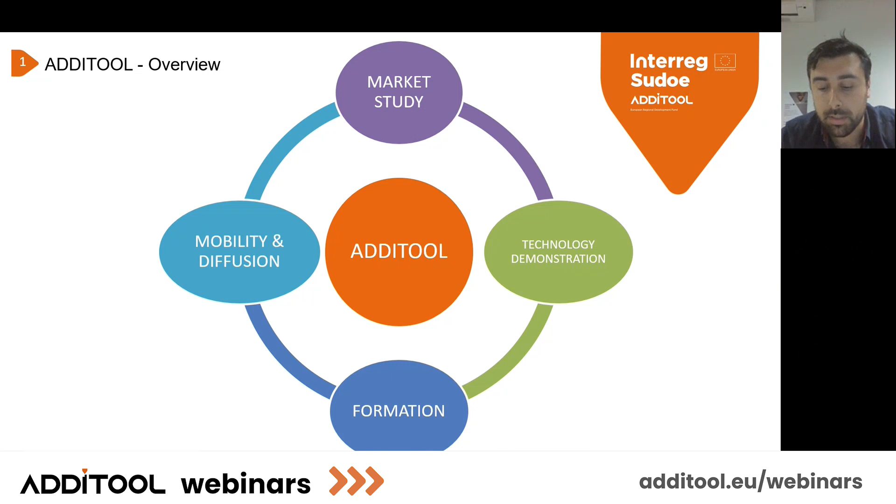The first work package of this project is the market study, which conditions the whole rest of the project. This market study made it possible to have a deep analysis of the tooling market, which we carried out in the first year of the project. We also carried out an opportunity study for the development of MAM technology, and defined real industrial use cases developed within the project.

On the Additool website, www.additool.eu, you can find the complete deliverable, downloadable for free in PDF format and available in 3 languages: French, Spanish, and Portuguese. And it's totally free, you can check it out.

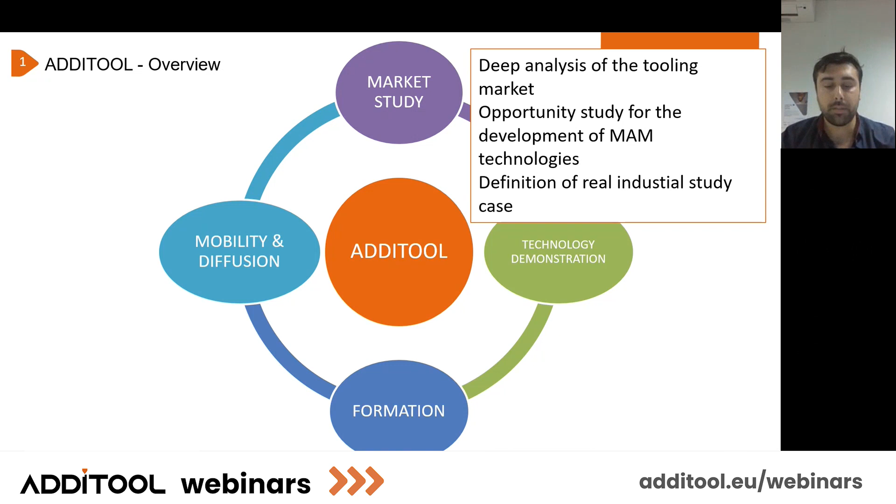The second main axis of the project was the technological demonstration part. Thanks to the market study we carried out before, it was possible to develop new materials, a new powder for metal additive manufacturing. We characterized the wire and the powder for each technology, so we had a lot of material testing, with raw material and also all the specimens after manufacturing. We performed various tests on this material.

And then we were able to manufacture five pilots and test them in real conditions. The tests in real conditions will take place from the end of January until February.

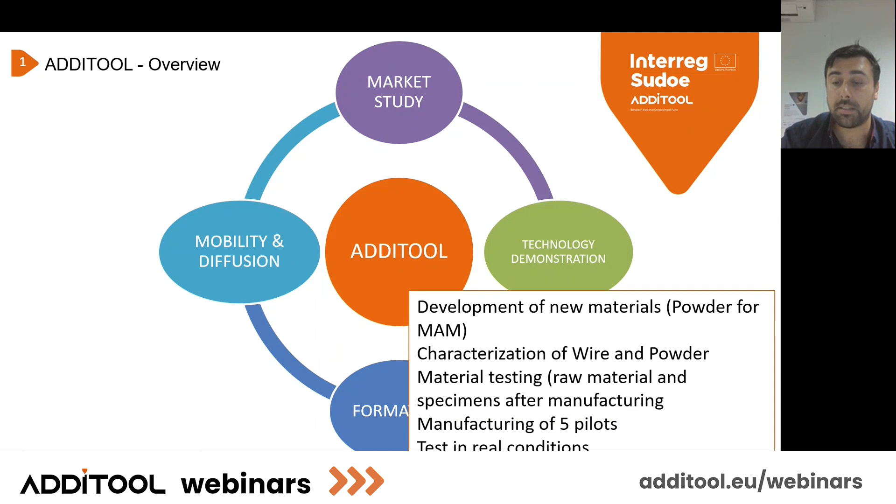Finally, the third and fourth major axes, the last work packages, are training, formation, and also mobility and dissemination. So we organized 5 training modules for students, about 2 weeks of training. We also had mobility of researchers and PhDs throughout the project, exchanging a lot of people from each entity and working with other partners, creating great collaboration.

And the last part is training through 7 webinars. This one is the 5th webinar we organized. You can find all the previous webinars we recorded directly on the project on the website, additool.eu.

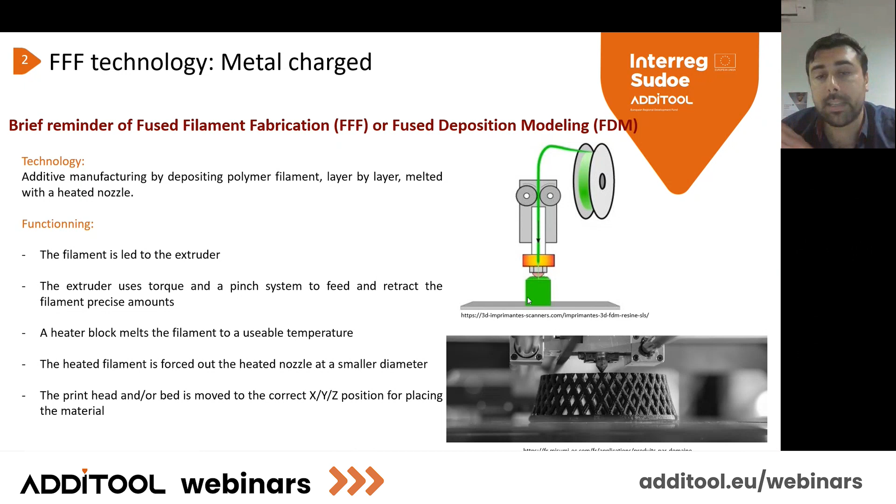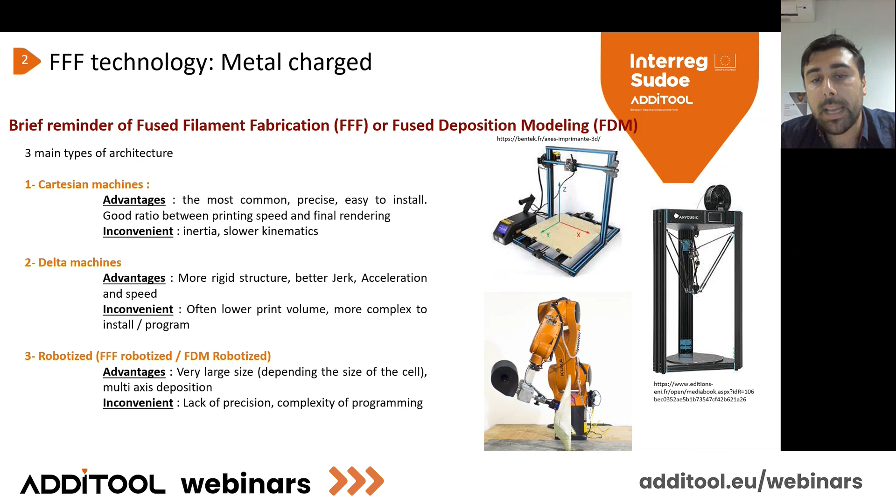It is more complex to install and program because we have a delta machine and not a linear axis. And finally, the last one is the robotized FDM-R, fused deposition modeling robotized, which allows a very large size depending on the size of the cell. It's multi-axis deposition; we can have a robot with 6 axes, and add a positioner to have 8 axes, moving in 3 dimensions. This is very interesting. However, with this kind of technology we can find a lack of precision due to the robotic arm, and it's much more complex to program.

Also, before I introduce the metal charge aspect, we have to take into account 2 main types of material distribution, and we will see that it is important for the following discussion.

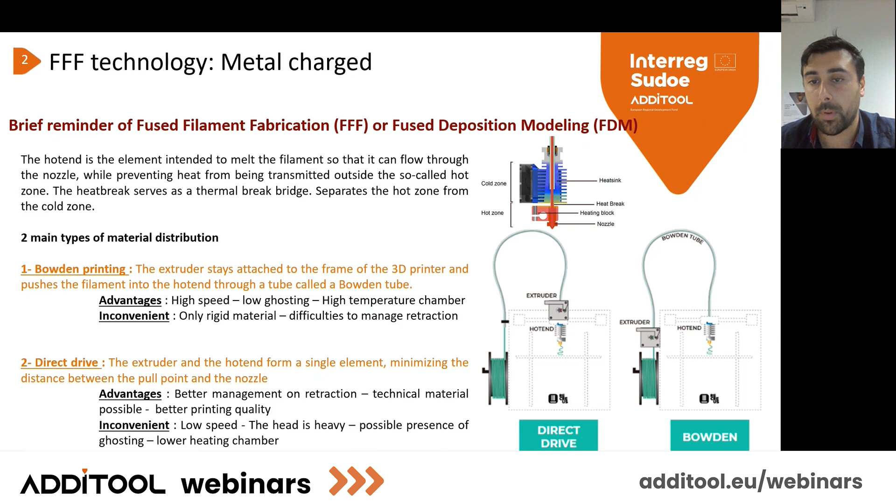So with metal charge, the objective, and it was also the objective of Additool, is to obtain an all-metal part using conventional 3D printing technologies.

So technology we can find directly on the market with Creality, Raise3D, Zortrax, etc. Every machine we can find on the market. And the objective is to make metal additive manufacturing technologies accessible to everyone.

As you may know, the other processes like DED wire, DED powder, or PBF laser, the cost of the machine is very, very important. It's more like 500,000 euros, 1 million euros for the machine.

And we have the idea at Additool to use technology which is based on the MIM process. It's MIM-like, it's metal injection molding.

The MIM process we can also compare to binder jetting technology. It's a powder bed with a binder. And we want to compare this technology, this material aspect, etc., to another technology.

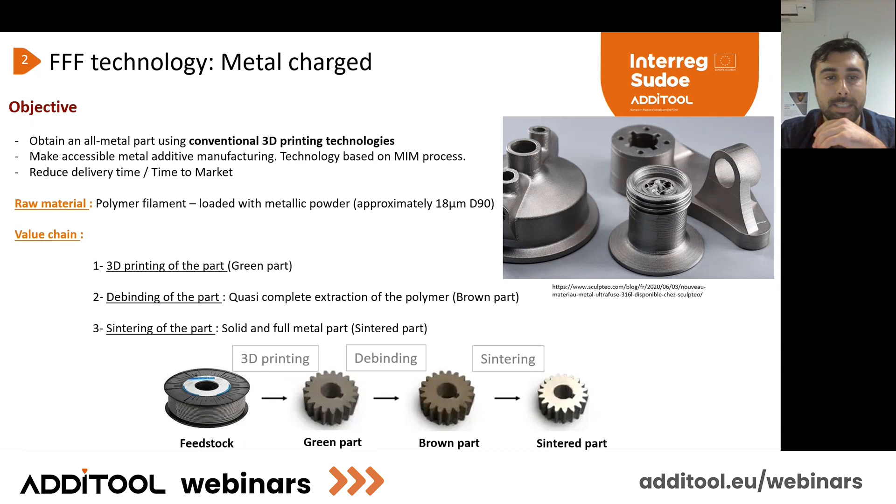On the market, we can find some new filaments. There aren't a lot of suppliers, but if you take a look on the internet, you can find BASF with an Ultrafuse 316L stainless steel and 17-4 PH, which uses catalytic debinding.

I will explain just after what's the difference between thermal debinding and another. So BASF uses catalytic debinding. We also have Nanoe with the new Zetamix 316L and Zetamix H13 with thermal debinding.

This is the material we took for the test. We also have Nanovia, which is developing a new MT316L with thermal debinding.

And we want to compare this kind of filament, accessible for classic machines, so open machines where we can modify parameters, etc., and play with this, and compare it to the reference of the market, the Markforged Metal X system.

The Markforged Metal X system developed a lot of materials at 17-4 PH, base copper, Inconel, H13, A2 tool steel, etc. But all these materials are dedicated to the Metal X machine, and it's proprietary, so you cannot modify parameters, you cannot play with the machine to optimize it.

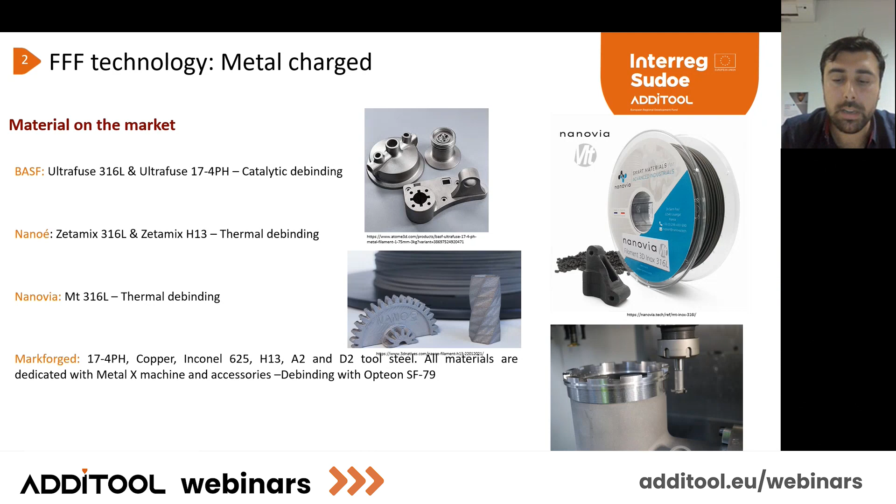After printing, you have the thermal treatment to do, because it's not enough to print. At the end of the machine, you have a mix between polymers and metal part, but you don't have any properties on it. And you have to debind it. The debinding is the key operation of the process.

This is the thing you have to master in priority, and it's a real job to master debinding. Debinding consists of removing the organic binders from the feedstock once the part has been printed. So the quality of this operation is very fundamental. All the fissuration, the cracking, all the damage on the part at the end of the oven, when you open the oven, is generally due to bad debinding. A very large part of the defects which appear after sintering is generated by inadequate debinding.

In the majority of cases, we have two separate debindings in the process. So we have the first debinding. The first debinding will open little channels from the core of the part to its periphery to help the second debinding remove all the binder inside the part.

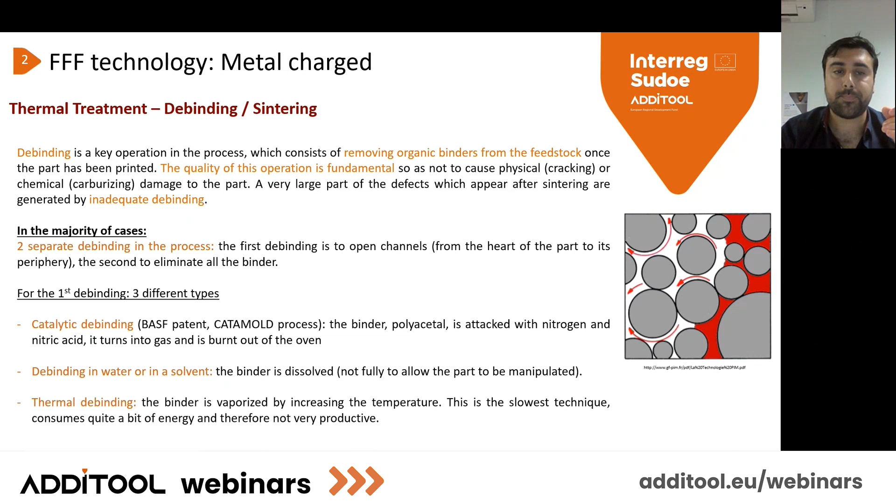Then we have the second debinding, and the second debinding for every process is almost always thermal. The objective is to eliminate all the rest of the organic binder. So it is possibly advantageous to have the second debinding in the same oven and in the same cycle as the sintering, to reduce handling, energy losses, and avoid oxidation, which can occur when we open the oven. So we advise doing it in the same oven.

However, you can also have a little bit of contamination during the first debinding or second debinding and the sintering. You have a lot of polymer that is vaporized, and you can have contamination in your oven. So it's important to note this also.

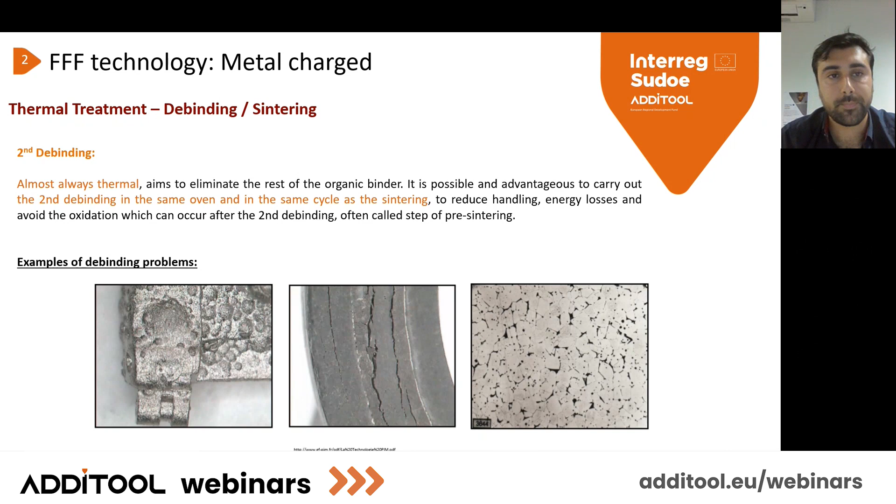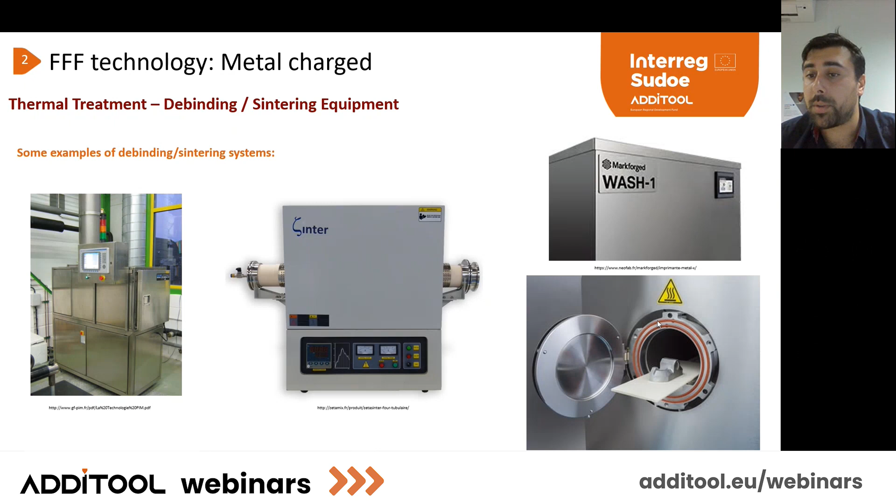And on the right of the picture, you can find the system, the equipment of Markforged, with a washer to debind with a solvent, with Opteon, and then the sintering oven, which is also cylindrical.

And then at the last step, we have the sintering. So once the debinding step is complete, the part must be consolidated with a sintering step. It's a thermal process, and when we heat compacted powders, it's important to stay below the melting point. The sintering gives them cohesion after cooling to obtain the desired microstructure of the final material. So we have a raise of temperature, a maintain, and then a decrease.

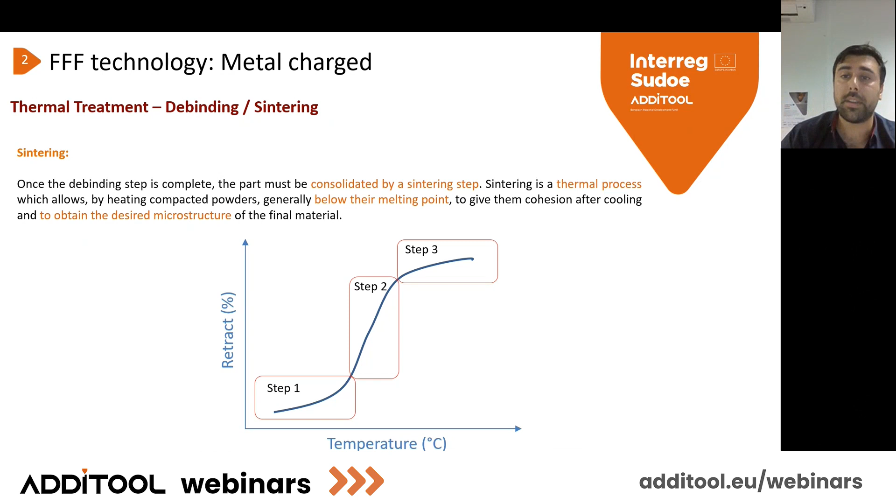Important thing is when we raise the temperature for the sintering, all the polymer dilates, which will cause a lot of retraction of the part. So the part will be reduced after the sintering. We have to master exactly the proportionality between the programming, the manufacturing, and the final geometry we will have after sintering. It's around 19 to 26% retraction, and it's different between the X, the Y, and the Z.

So that's why I explained a little bit before. The part after debinding has grains of metal. Step one, we increase the temperature, and they start to weld to each other. We reduce the porosity. Step two, the same, and finally we have the sintered part with some closed porosity because we sinter at atmospheric pressure.

Instead of classic sintering of powder with force applied outside, with 3D print machines you will have a lot of different geometries, so it's not possible to have pressure in the sintering. We can have the HIP that we tested, I will explain after, but you cannot have a mechanical force external because you have a lot of different geometries.

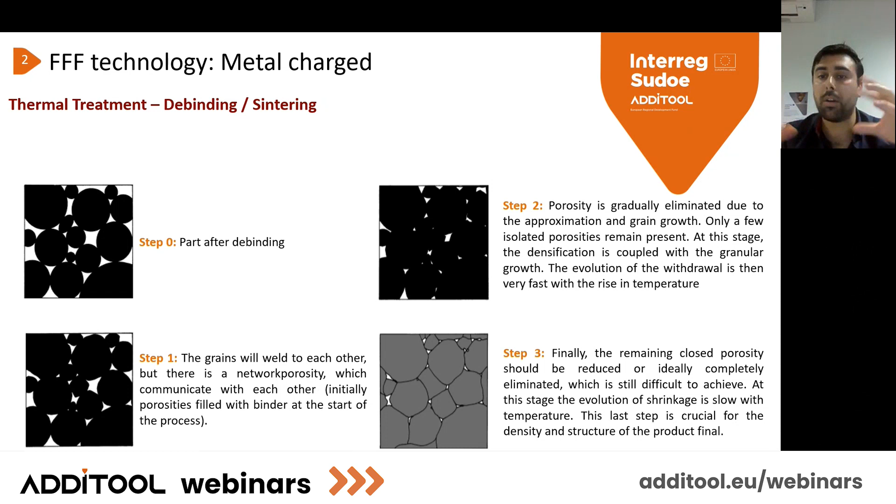However, what we can analyze is that the parts are little and flat. If you take the plate, it's not so high. So it's a little part, and the thicknesses are equal. If you look at the three parts, the thickness of each wall is equal. So it is easy to debind when you have equal thickness on different walls. So it works for little parts.

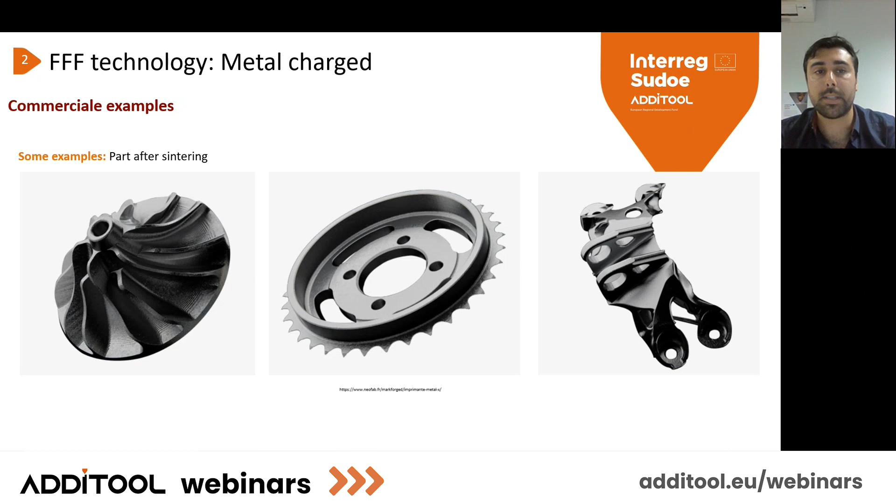And to do it, we also have to respect the curve that the supplier gives us for the debinding and the sintering. For example, in Nanovia you have a curve. It depends also on the polymer you have, and it depends on the different metal. The 316, the temperature of sintering is different than the H13 at more than 1,300.

And also the time is different. For example, in Nanoe Zetamix H13, the time of the debinding and sintering is about 91 hours. So it's complicated for an SME to launch a heat treatment on Monday and have the part on Friday after.

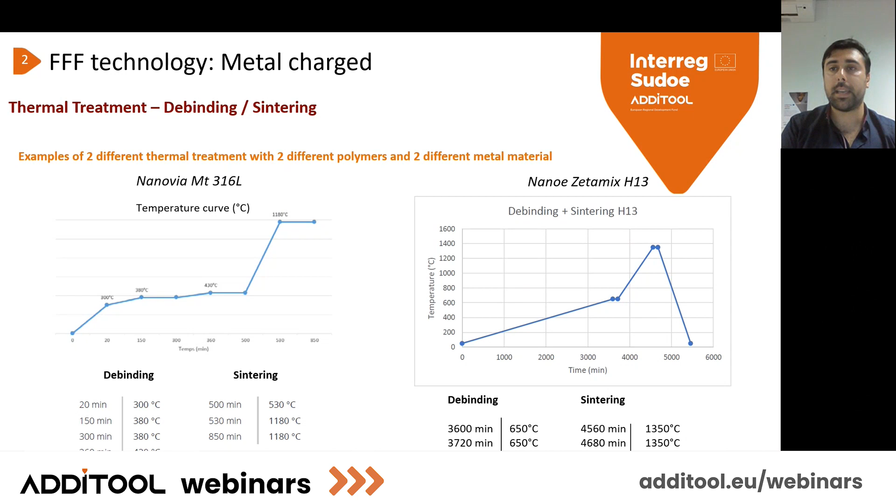Okay, but you have some rules, some curves you have to follow to print the material and to have a final part after. In the Additool project, when we saw this kind of technology, we said, okay, it's very, very interesting, and we want to test it. So we called Somocap.

It's an associate partner of Additool, and they gave us a kind of part. Originally it's a part of an injection mold, and the original part has only a simple hole for cooling the polymer part all around. The objective of the project is to do some conformal cooling, to greatly increase the performance of the cooling system and the cooling of the polymer all around the injection.

And the objective is to manufacture this part with FDM metal charge technology and to sinter, to compare with and without HIP, hot isostatic pressing, to machine the part to respect the dimensions, and increase the performance of this tool by adding a cooling channel inside, as I said, and we will compare two different technologies.

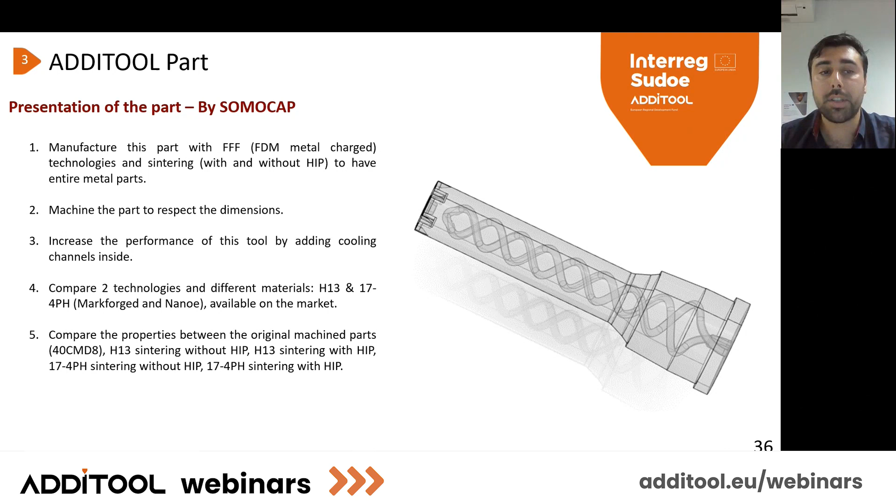So we will compare the reference, the Markforged, in comparison with the Nanoe H13 available on the market, which offers the possibility to be mounted on every classical machine. Then we have to compare the properties between the original machine part, the H13 with Markforged, or the 17-4 PH with Markforged, and also with Nanoe.

Before doing it, we have to respect a lot of recommendations in terms of design rules that I will explain just after, but also some guidelines for the extrusion. As I said before, this is why I made a little reminder.

Given the fragility of the filament, it is loaded by more than 50%. So you have 50% polymer and 50% metal powder in terms of volume. That's about 90% in terms of mass of metallic powder, but 50% in volume. A direct drive machine is recommended because the filament is very fragile. Also, the nozzle has to be 0.6 millimeter minimum in diameter to prevent it becoming clogged. In Additool, with our machine, a Lynxter, we took 0.8 millimeter. It's better, and we have more fluidity directly on the filament.

Also, due to the abrasiveness of the filament, the nozzle has to be reinforced, at least on steel, but it's preferable to have some treatment on ruby or ceramic directly on the nozzle to avoid an increasing of the diameter at the end of the manufacturing.

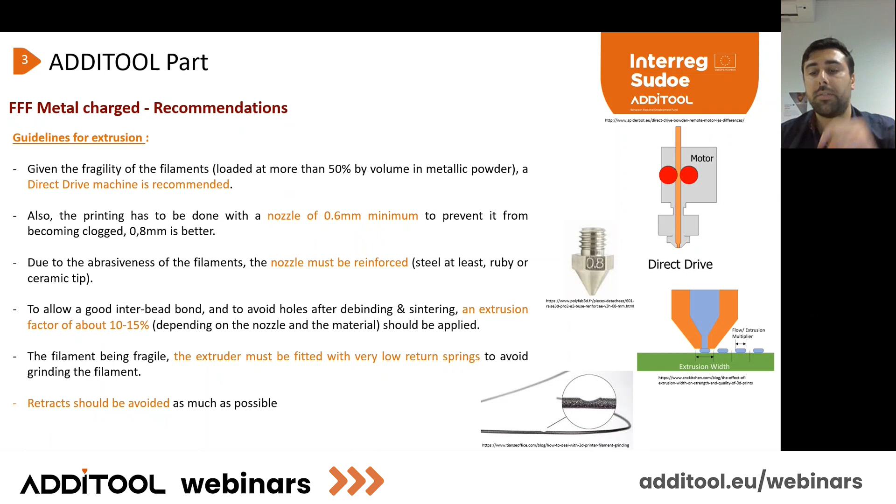And we have to avoid any retraction of the filament. We only push the filament, we don't have any retraction. We have to avoid it as much as possible.

Also, something good: we have some supplier guidelines. Each material is different, we have different polymers and different metals, and the charge rate is also different. Don't hesitate to take a look at it.

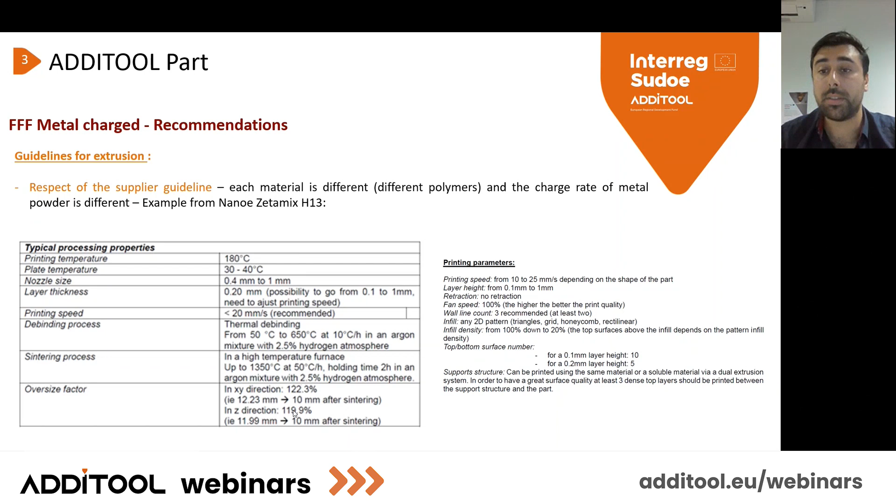For example, you have the conditions for debinding, the time, the ramp of increasing temperature, and we also have the oversize factor in X and Y direction, about 22.3%, while on the Z direction it's only 20%. So it's different - don't hesitate to take a look at it.

Also, some design rules for 3D printing. Due to post-printing treatment, as I said before, you will have a decreasing of the geometry, so you have to master it precisely. My advice is to create the part in CAD format at the good dimension, and then in your slicing program like Simplify3D, Cura, etc., put another scale directly on it in X, Y, and Z.

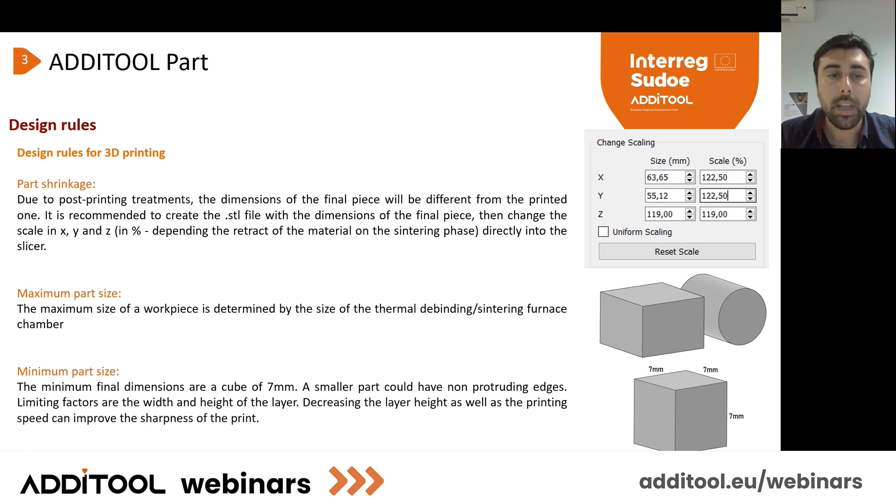So you will have a maximum part size. Important trick: the maximum size is not depending on your printing machine, but on your debinding and sintering furnace. This is very important because if your machine can print 500 millimeters and your oven only 100, the maximum size will be 100. It's very complicated on the market to find sintering and debinding ovens more than 100 millimeters in diameter. So that conditions your maximum size, and the minimum is about 7 millimeters.

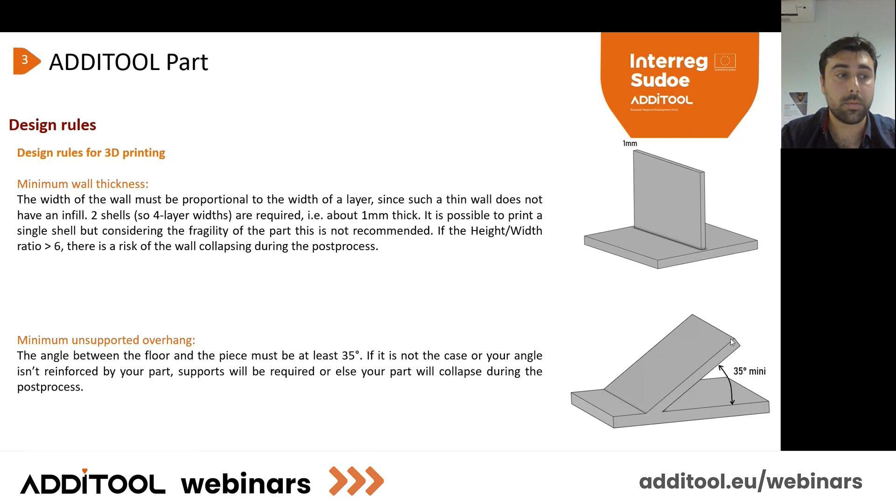Minimum wall thickness is about 1 millimeter, or the thickness of 1 or 2 wall beads. You also have, like a classical machine, an unsupported overhang - for printing it's 35 degrees minimum. However, for debinding beyond 35 degrees, you will need support to avoid collapse or deformation during the debind process. So support is necessary both to debind and to sinter.

Maximum solid wall thickness - this rule is very important, but only for processes that require thermal debinding. It is not possible to have thermal debinding of a big wall about 20 millimeters thick, because you will not debind from the core to the periphery. You will have a lot of deformation, a lot of collapse, etc. So it's important not to go above 5 or 6 millimeters for thermal debinding.

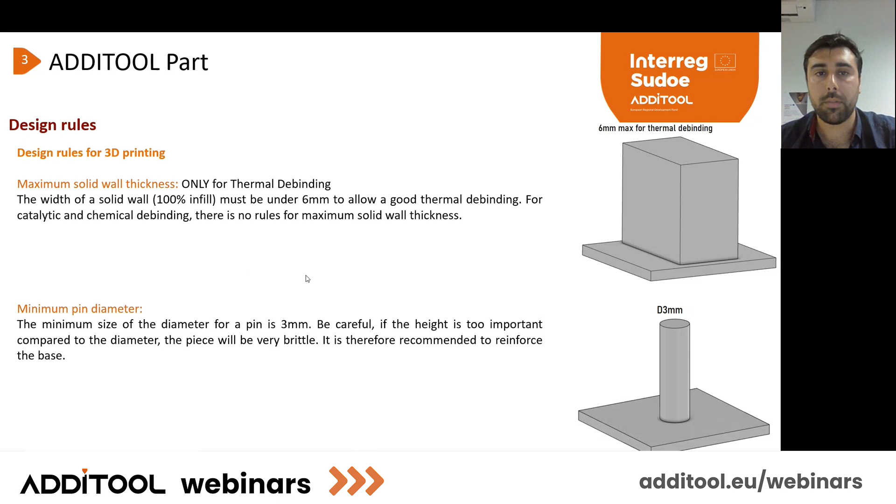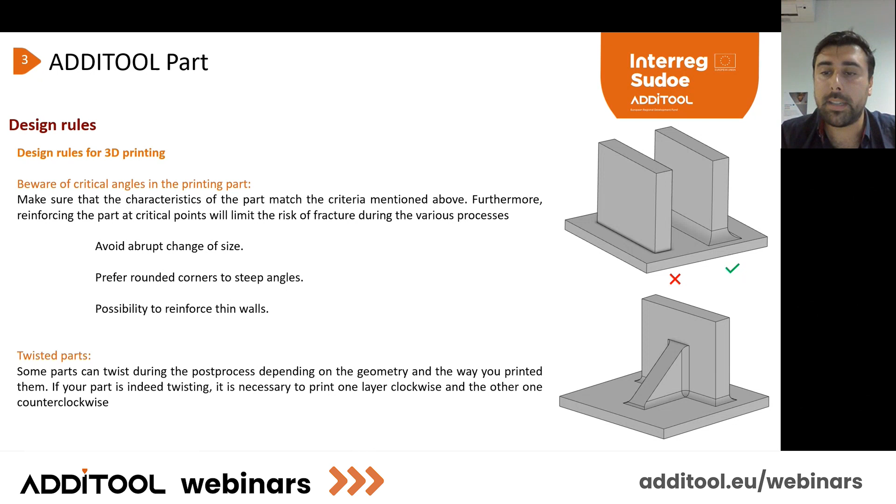Something important also is to beware of critical angles - this is true for every process, like machining or metal additive manufacturing. Prefer to use some transitions or curves in the edges to avoid abrupt changes of size. Also, don't hesitate to put some stiffeners like this to avoid a twisted part after debinding and sintering.

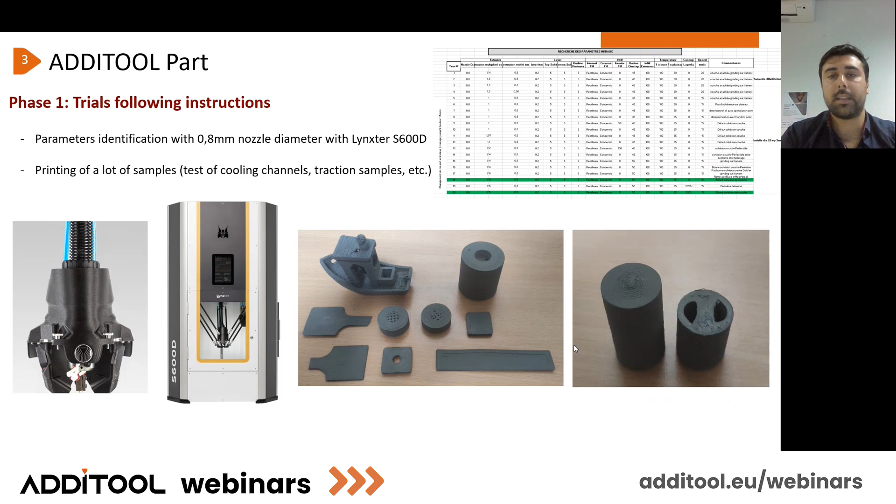And the debinding, we have done it with a mixture of gas: argon and 2.5% hydrogen to avoid oxidation and to remove correctly the binder.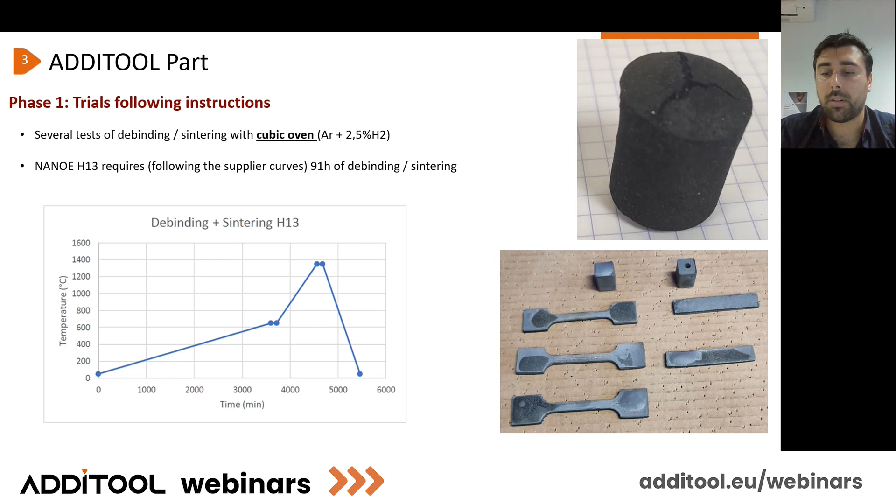Nanoe requires 91 hours of debinding and sintering, and this is the best result we achieved with our cubic oven. This is the best part we did, because the oven is not adequate, and we still have some bubbles like I showed you before. We still have some polymer contamination, etc. And we judge that 91 hours of debinding and sintering is not great for SMEs, is not viable for the industry, so we have to reduce it.

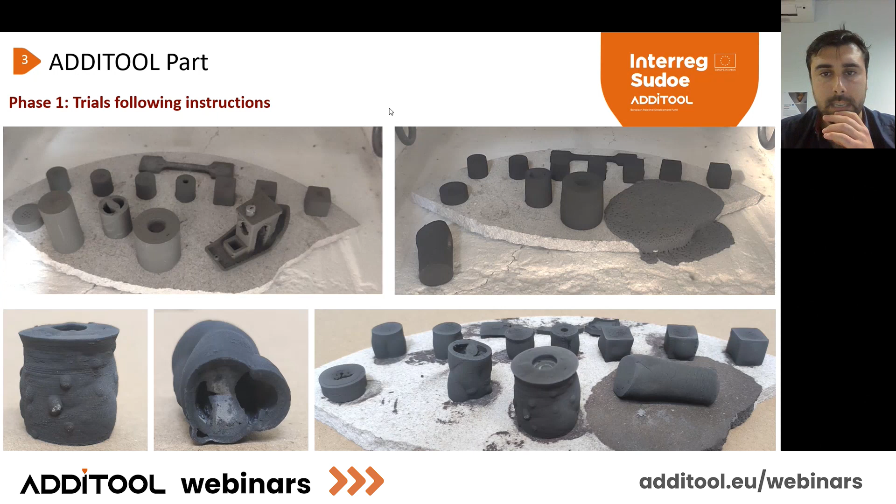Some pictures about the test. We see the part here, and the part doesn't exist anymore. We have a lot of collapse, a lot of bubbles. We have deformation, cracking. So every kind of damage we can have, we got it with this kind of oven and this kind of filament.

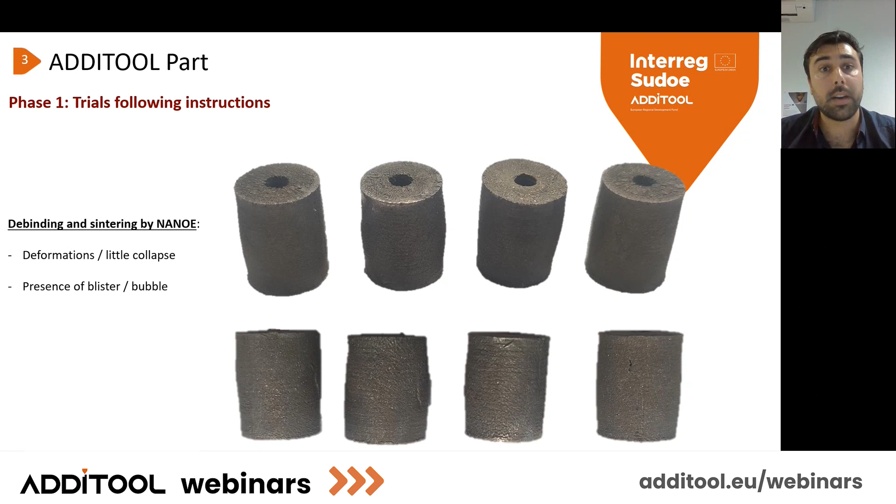Because we are not able with this cubic oven to perform it, we called Nanoe. This is a supplier of the filament, and we printed several samples like this, about 20 millimeters of height and only 15 millimeters of diameter. And with the supplier also, with this kind of little part, we have still deformation and little collapse, the presence of blister, bubbles, etc. So this kind of filament yet with the curves that the supplier gives us doesn't work as we want.

So we have a too long debinding and sintering cycle. We have very poor mechanical properties and very high consumption of gas, about 1.6 liters per minute, and with the complete cycle it's about one gas cylinder of 50 liters at 200 bars. And we have a poor distribution of gas in the cubic oven.

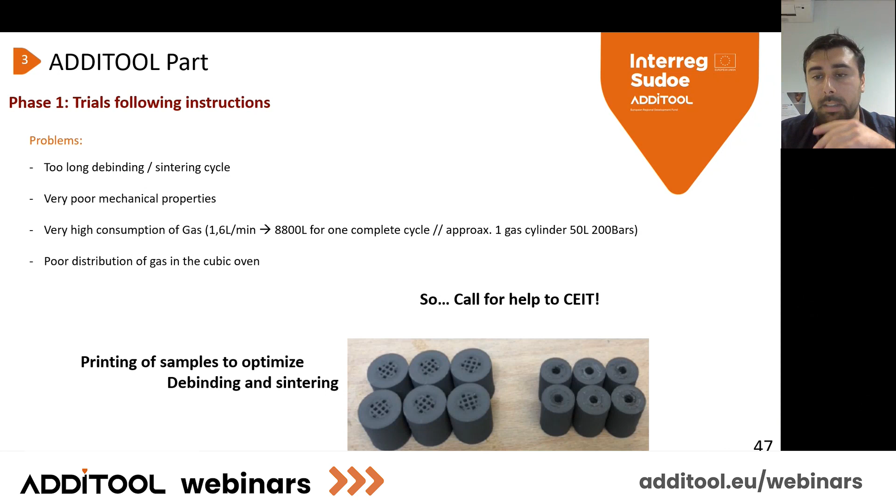So we called for help from CEIT, one of the partners of Additool, and they are experts on this kind of job, sintering, debinding, etc. It's their job. So we printed a lot of samples to optimize this process.

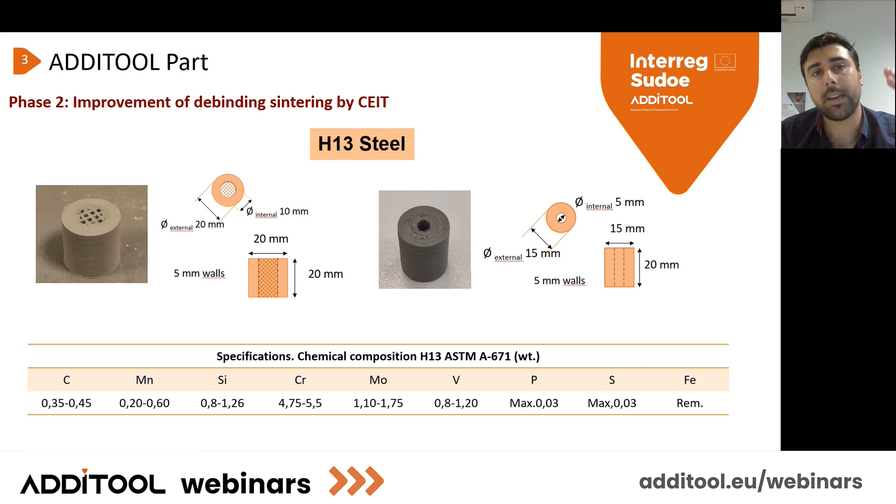So as I said, these were some specimens, 15 millimeters of diameter and 20 millimeters high. You have the composition of the H13, remember it's about 0.4% carbon. And the objective of CEIT is to optimize exactly the debinding and sintering to do something with this kind of filament.

And after several trials, they wanted to perform a chemical debinding first, about 5 hours at 50 degrees, with an immersion of the part in isopropanol alcohol. It's a classical alcohol that everyone can have in the company.

Then they optimized the curve of the thermal debinding, and we see here that we have only 10 hours of debinding and also sintering. And they also performed a HIP to close porosity. We will see that just after.

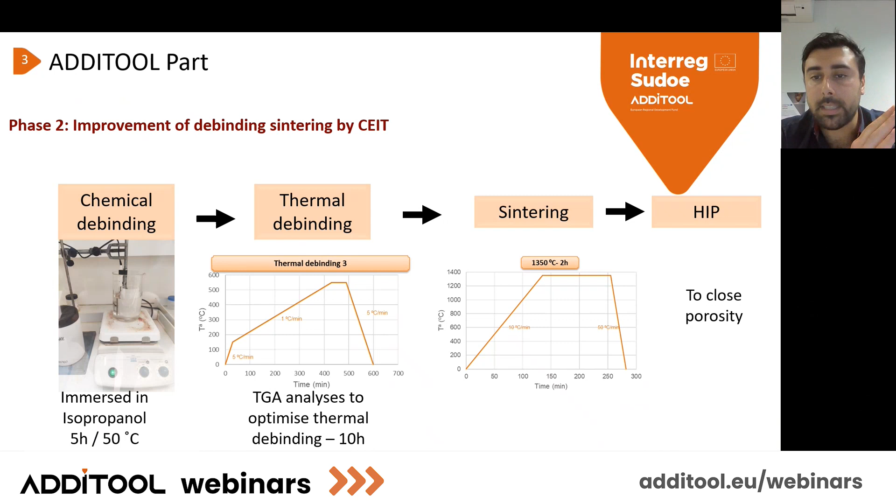So with the expertise of CEIT, we reduced about 91 hours of debinding and sintering to 17 hours, which could be interesting for the industry. To do it, they performed some thermogravimetric analysis, so we can see two steps for debinding.

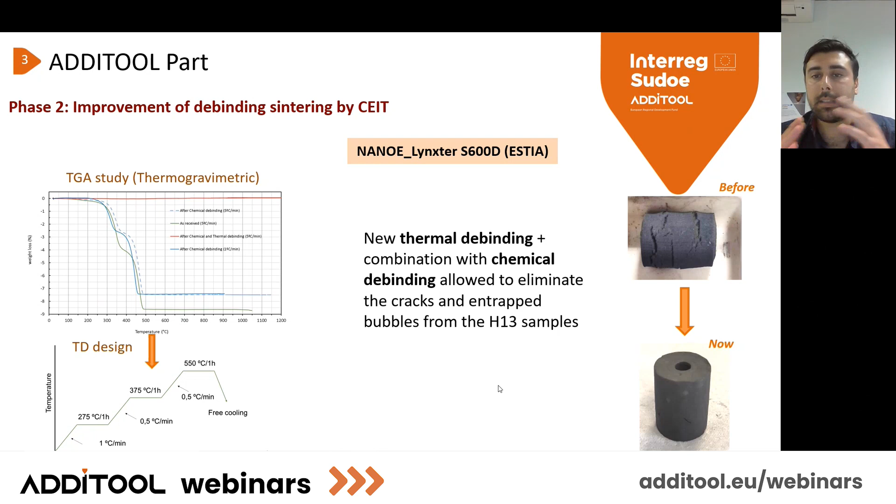Without chemical, with chemical, etc., they adapted exactly the curve to find the good temperature and the best way to debind. So before we had something like this, and with the new thermal debinding, we have something like this. So it's better, and it allowed us to eliminate the cracks and the trapped bubbles from the H13 samples.

The sintering is successful, but we have a problem regarding the periphery of the part. We still have some porosities, but this is due to the difference in the manufacturing strategy, because you have a contouring perimeter outside and the infill. So we have to retake the parametry to oversee exactly the overlap between infill and perimeter, but we still have some internal porosity due to the process.

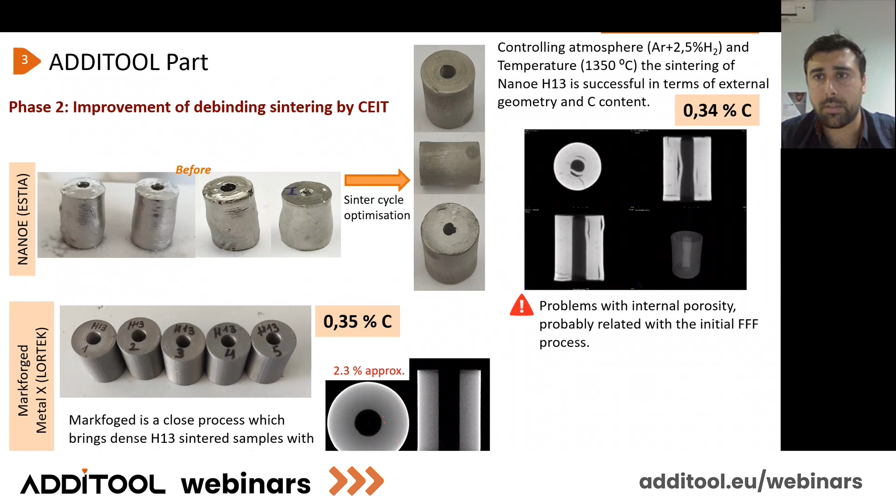However, as I said, the Markforged process has a very good result. This is a reference, all the samples are very straight. You have some porosity, but about 2.3% or less than 5% porosity. This is the reference, and inside, FADA CATEC and UPV performed some tomography.

So 3 samples have been inspected, and we see a lot of porosities inside. So the thermal debinding was not so good with the result of Nanoe. And before HIP, we have only 85.

Not so easy to print. We have a little bit of clogging of the nozzle on one layer. You have some deformation, etc. So you have a lot of porosity inside, and the mechanical properties are very poor.

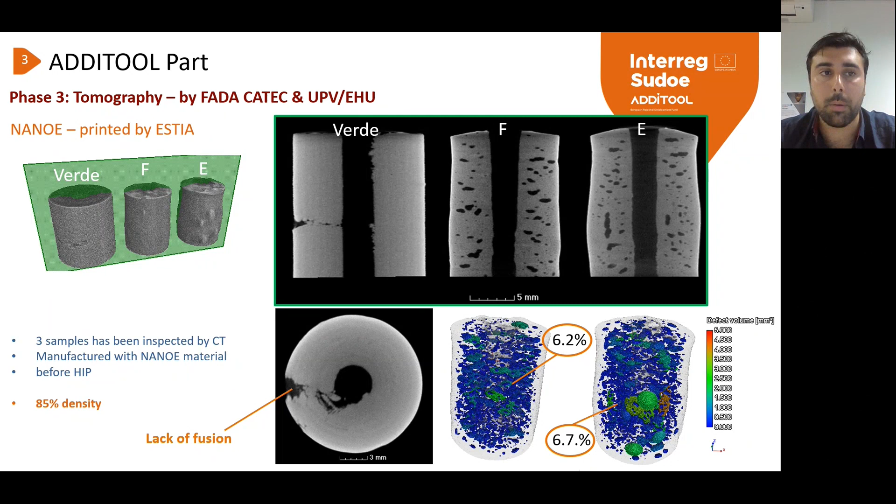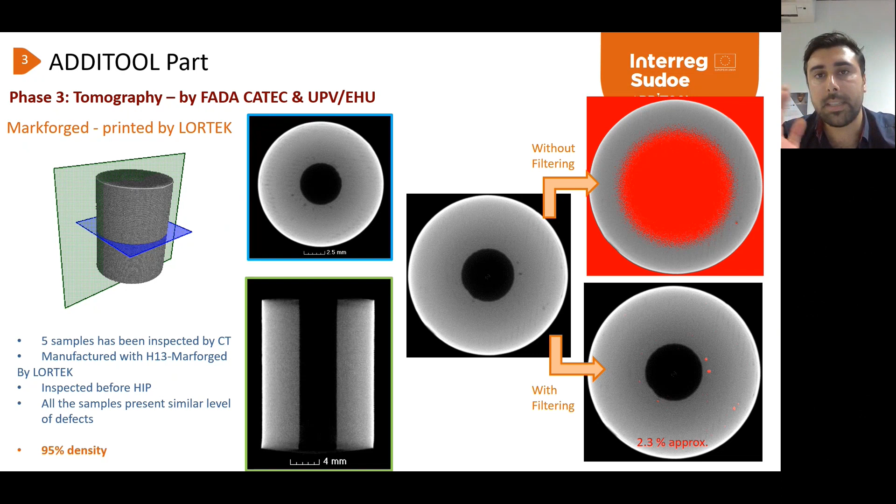Contrary to the Markforged, 5 samples have been inspected by tomography before HIP, and we have 95% density. So we have still some porosities inside, but the density is quite good, and we are about the same densities as the binder jetting technologies.

And after HIP, so hot isostatic pressing, at more than 1150 degrees and 150 MPa of pressure, most of the internal pores are closed, as well as the NanoE filament, as well as the Markforged.

So this is something that can replace a mechanical force for the sintering. You can have access to a HIP. But in terms of price, it's very expensive, and I am not sure - it's my opinion - that every SME will perform a HIP with each part they manufacture.

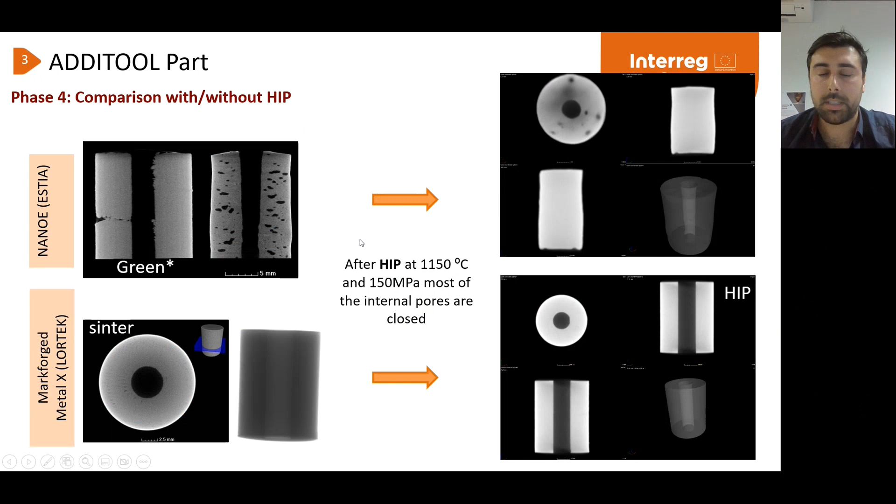So we abort the NanoE filament because it's not possible. This is only a little specimen, but the part we have to manufacture, like this part of SOMOCAP, is about 200 millimeters of length. And if you take a look at it, this is manufacturing by Lortek with Markforged Metal X. The manufacturing, even if the part was cylindrical, has not been made vertically.

The manufacturing was only horizontal, okay? Because during the debinding and sintering process, the oven dimensions are not enough to place this kind of part vertically in the oven. So they print horizontally, and then they can push it into the oven horizontally.

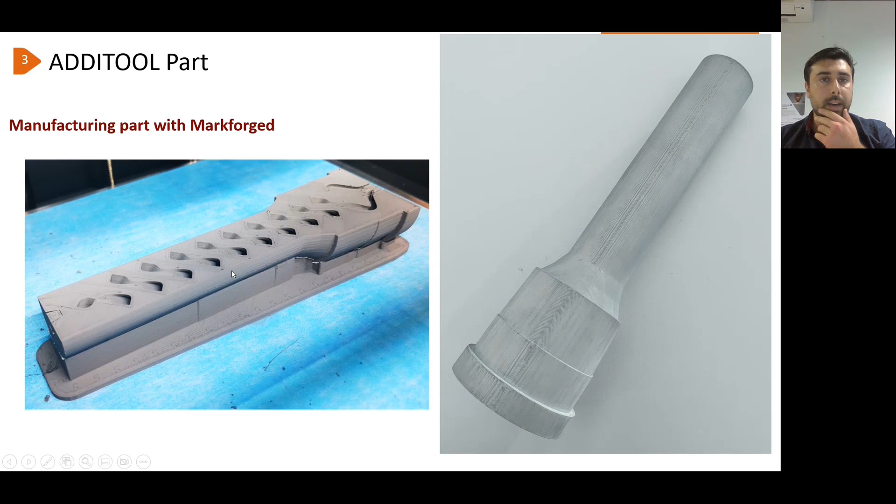And you see also some support to avoid collapsing or deformation on the geometry with this such big dimension part. And inside, this is a cutting - you have all the cooling channels near the periphery. So this is a part manufactured by Markforged with filament.

And also, we have seen on the market a company named Rapidia. It's Canadian, so from the American continent, and they are developing a new technology. It's not with filament, but with aqua paste deposition. It is something very interesting that can be the next future, because with filament you are blocked with a charge in the printing.

You cannot have a solid filament that you are able to print beyond 50% of metal charge. With the aqua paste, you can have a lot of charge without any defect. So it's an aqua gel, an aqua paste liquid.

But it's the same technology - you are pushing the aqua paste and depositing it like filament. So the printing is like an FDM process, but you can have more than 80% or 90% of metal powder inside.

But to do it is not so easy because the dimensions are very big, and it took about 6 months to have such a part. I have it with me - I received it on Tuesday this week.

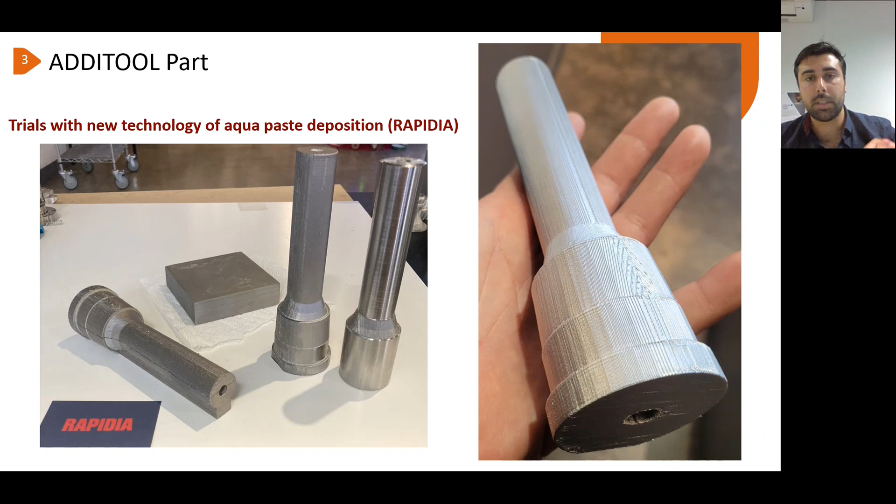So we have to machine it. We have to perform some tests. We will make some tests with the walls - with the wall specimens where we can machine some traction specimens directly inside. And then we will test this part on real conditions at the Somoka production line.

So to conclude, the debinding and sintering process have been optimized for Nanoe H13 thanks to CEIT, obtaining good external geometry and controlled C level. However, we still have some heterogeneities in the printing process that can create difficulties in obtaining a successful demonstrator.

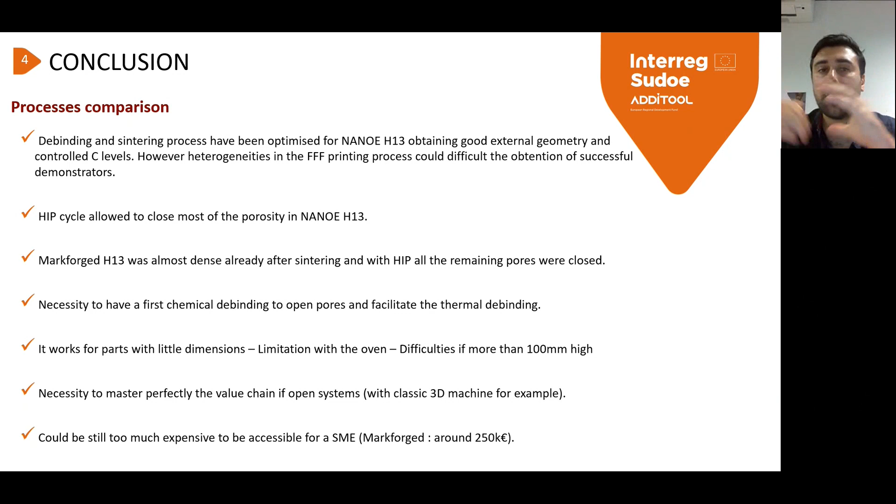Something interesting also is that the HIP, hot isostatic pressing cycle, allows closing most of the porosity in the Nanoe H13 and also with the Markforged. Markforged H13 is almost dense already after sintering, and with HIP we have 100% density, so very interesting.

But we have analyzed that it is necessary to have the first chemical debinding to open pores and facilitate the thermal debinding, and to have also a cylindrical oven, not cubic. So chemical debinding is very necessary to open channels and greatly reduce the time of debinding and sintering.

It works - this kind of technology works for parts with little dimension, so less than 100 millimeters. But we have a lot of limitation with the oven and difficulty if it is more than 100 millimeters high. It is also necessary to master perfectly the value chain if you are using an open system, and to debind and sinter - it's a real job.

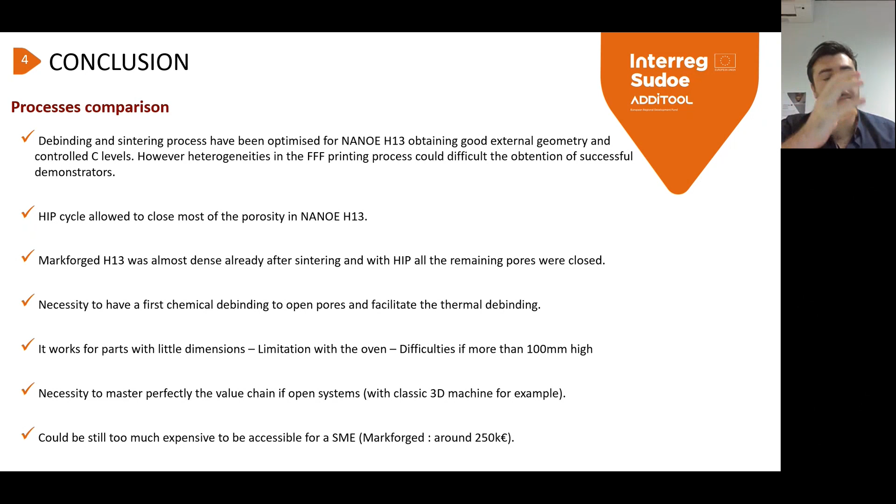On the market, we can find, and we have seen at Formnext this year, that a lot of partnerships are created. A company that masters the printing, a company that masters the debinding, and a company that masters the sintering. This is the case also for BASF.

BASF's economical model is that you print the part, you send it with the coupons, and every week they perform post-treatment, and they send you the part again. So in 1 week or 1 week and a half, if you print the part, you can have a metal part from your classical machine.

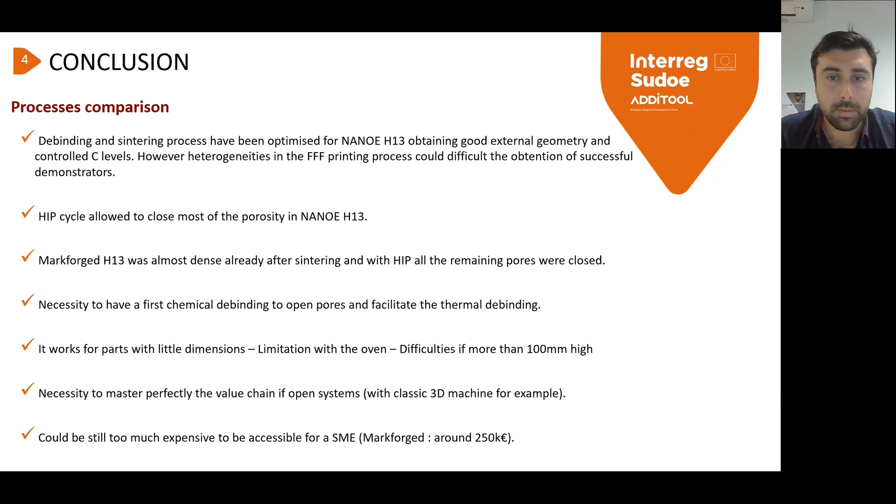At this moment, in January 2023, it's still too expensive to be accessible for SMEs. The cost of the Markforged is around 250,000 euros, but you can have some subcontracting that could be very interesting. We think it's not really ready yet, but in the following months or next year, I think a lot of stakeholders will enter the market, and it will be more reliable and maybe more accessible. So I think there is some hope for this technology.

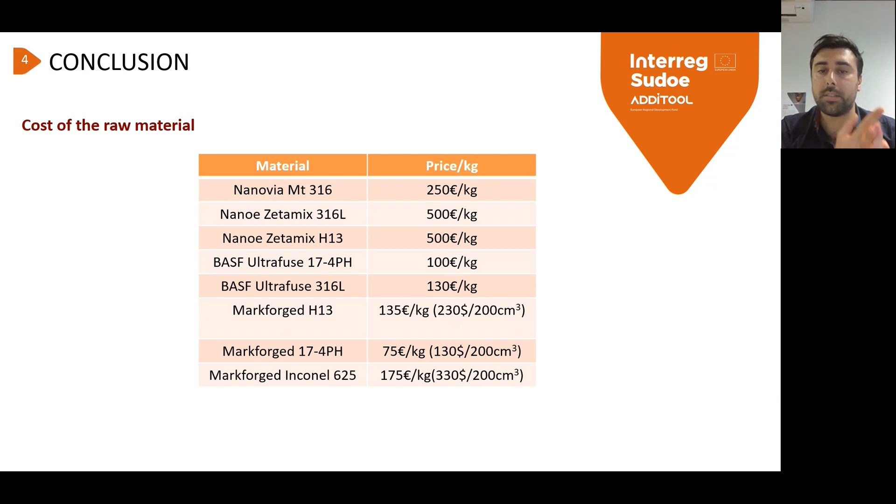Just for information, here's some idea of the cost of raw material. Nanovia is about 250 euro per kilo. Nanoe is a little bit more expensive, at 500 euros per kilo. And BASF is 100, and the Markforged is less expensive, but you need to have the complete system—the Metal X, the washer, the sinter, and the proprietary material.